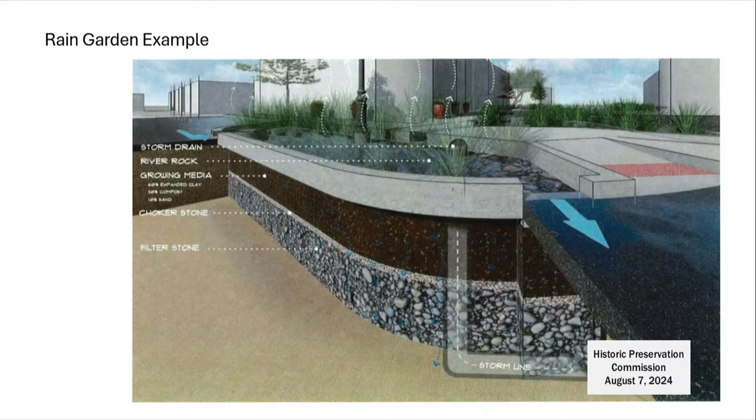There are two elements that are somewhat unique. Rain gardens are being proposed at the intersection of 28th and 29th. They have infrastructure that allows them to take the first flush of rainfall off the roadway and then dispense it back more slowly into the city's infrastructure system. Visually from the surface, it really won't appear much different than the landscaping you'd see in the recently completed Paseo Street Enhancement Project, but we're hoping it would at least mitigate some of the flooding that has typically occurred at those two intersections.

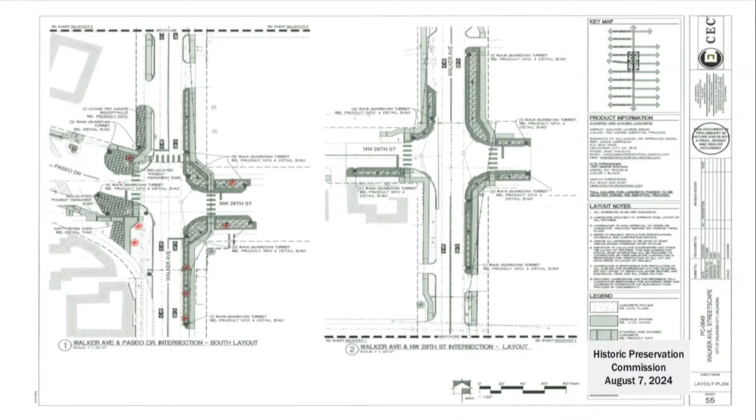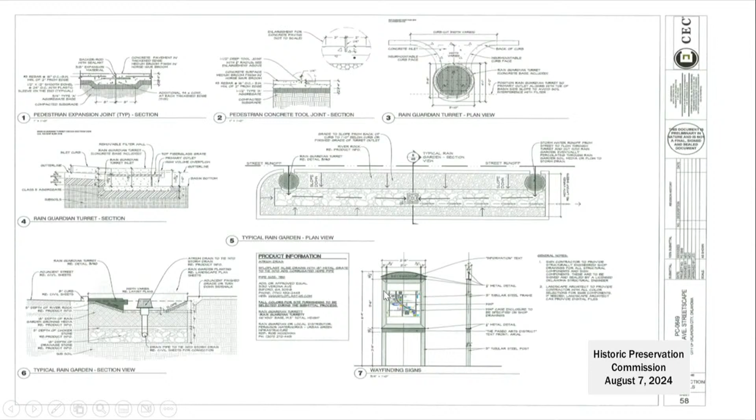And then the second item is, rather than advocating for an additional four-way stop on Walker, we will be petitioning adjacent property owners for the use of speed cushions along that segment of Walker. They're part of the city's speed abatement program, and the thought is that they would be appropriate to slow down traffic that perhaps is currently using Walker as a bit of a cut through. Again, I apologize for going fast, but if y'all have any questions, please let me know and we'll try to get that information back to you.

We have been working with Mike on this and on a number of other streetscape projects throughout our design districts for some time now. This one will come through eventually for a certificate of appropriateness. It may or may not have to come back to the commission depending on the scope of the changes. We have the ability to administratively approve a lot of work when it comes to sidewalks and that sort of thing, but particularly with the rain gardens, we wanted to get that in front of the commission. That's a big change from our typical design features in the area right now, so we just want to make sure you all didn't have any comments or feedback on that at this point. You guys can review this from now till it comes back, and if you have any comments that occur to you later on after this meeting, feel free to pass those on to staff, and we'll communicate that back to Public Works.

I walk this often. I'm excited to see the sustainable design efforts to help with the rain mitigation, so this is exciting. Very pretty. Yeah, no concerns so far. Thank you. Thank you. Thank y'all again very much.

Okay, next up, we've got our consent docket, and it appears we have one item on the consent docket today. That's item HPCA-24-0079.

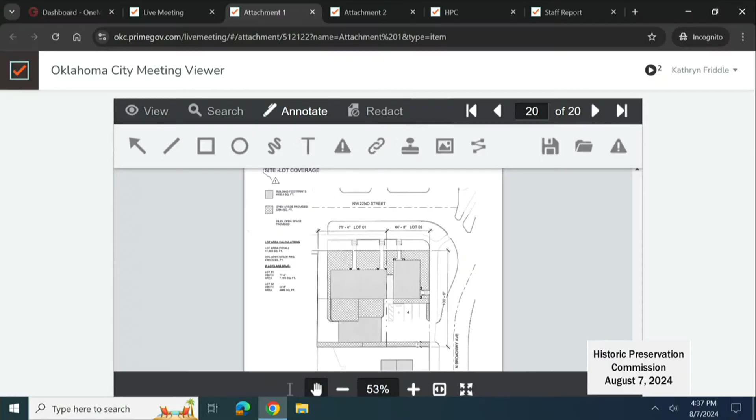20 feet is what we achieved. Now, on the eastern half of the site, these are actually oriented to Broadway, and we've pushed those up. Our thought was that it provides a nice end cap to that street. If you live to the west of this site, your visual of Broadway is now partially blocked with what will be a residential structure.

So we think it provided a nice end cap, kind of closing in, for lack of a better term, the residential piece of this, blocking that heavier, faster traffic along Broadway. And then we have that unit in the back as well.

Additionally, because of traffic concerns, we have access points off not only Broadway but 22nd Street, and we think providing that access off Broadway will relieve some of the traffic that may otherwise come down 22nd Street. We do meet code as it relates to parking. I know we don't want to get into a protracted discussion about parking, but we do meet code.

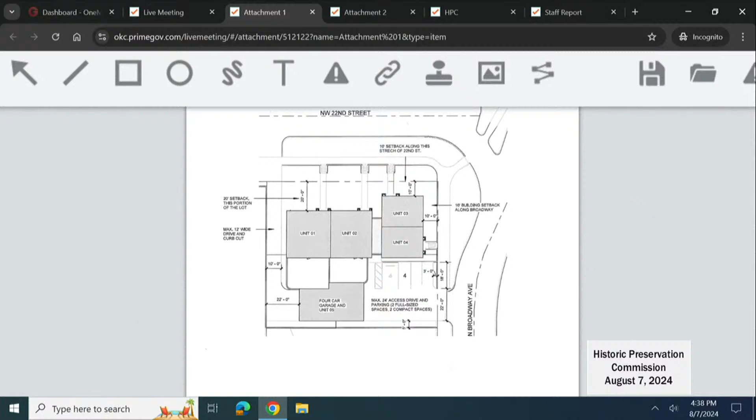Our hope is that the neighbors and the commission see the progress made through meetings and realize it's a unique and difficult site because of the factors described. What we have here represents a nice compromise. So we are asking you for a recommendation to then go to Planning Commission tomorrow, asking for a recommendation. Ultimately, six weeks later, we'll be at City Council.

Happy to answer any questions as it relates to density. This is kind of the core, and in terms of increased density on infill lots, the comprehensive plan really strives to increase density on infill lots. So what we have here is hopefully viewed as a nice balance. Happy to answer any questions. Ask for your approval.

Okay, commissioners, what questions do you have for the applicant? I like it. I don't have any.

Just speak loud. So if you look at the county site, there's actually three lots platted. You're just doing the top two that are closest to 22nd, right? And that third lot that also faces to the east has an existing home on it that is not being contemplated? Correct. Yeah, that's not a part of the application. Okay, just want to make sure I understood.

Do you feel like you'd be willing to work with the conditions that staff recommended, that you revise the open space requirement to be more consistent with the surrounding historic development and include language clarifying screening of parking? So condition 2, as Katie mentioned, we're agreeable to that, replacing the word commercial with multifamily.

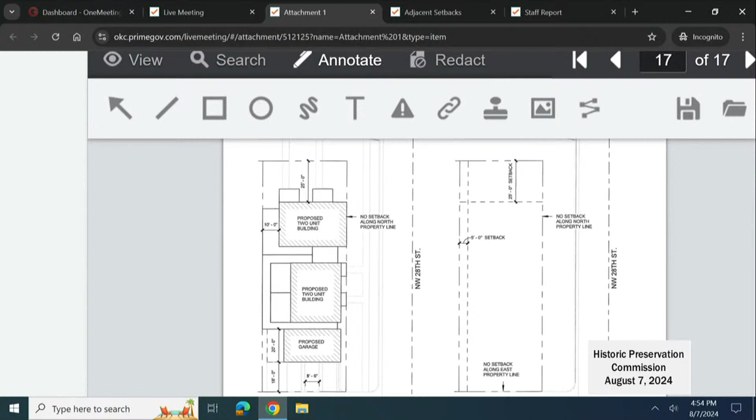The idea is we have 3 different structures—2 main structures with living units in them, and then the proposed garage. Between the garage and that second living structure there's a walkway. He wanted to have some back doors off the back of the garage, giving people the ability to walk into their unit from the back door, essentially, like if you're carrying groceries or parking. So that's the plan there.

We're a little constrained on the site because we also wanted to make sure we had adequate parking—that was a concern of the neighborhood—and he wanted to make sure there are 2 parking spaces for each unit. So we set the garage back 18 feet from the alley where we're taking access. You can park basically 1 car in front of the garage and still access the garage unit. So that's the issue—theoretically we'd need 6 feet per Municode, but it's not a life safety issue, not a building code issue, just a municipal code issue. We're going to see if we could modify that to 4 feet.

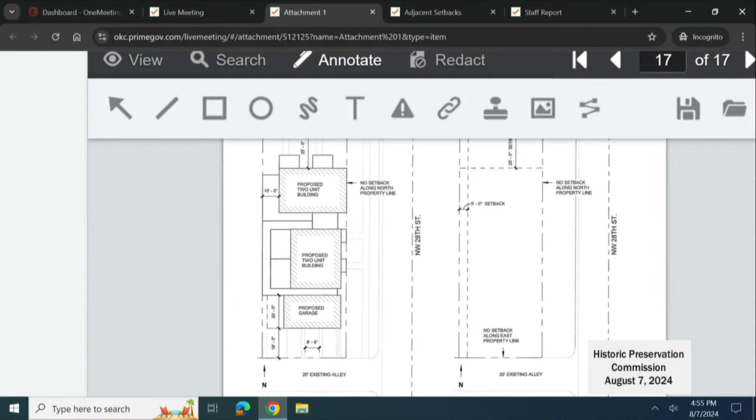Okay commissioners, what questions do you have for the applicant? Any comments?

I don't have any—I like this one too. I think y'all have done a really nice job. It feels really appropriate; spatially, of course we haven't seen anything else, but it feels like an appropriate use of the space. Any other comments, commissioners?

Do we have any members of the public that wish to speak on this item? Okay, there being none. Do we have a motion, a recommendation on this item?

Oh sorry, can we jump back to how we're comfortable communicating that condition and what the preference is there? On the spacing?

So I think you could make the recommendation that's in the staff report with the findings, and add the additional comment that the commission supports reducing the separation between the primary structure and the garage to 4 feet.

Okay, that still felt like a lot of words, sorry. I recommend approval of SPUD 01655 with the specific findings in the staff report, and the added comment that the Historic Preservation Commission is comfortable with the reduced spacing between the primary and accessory structures as discussed in today's hearing.